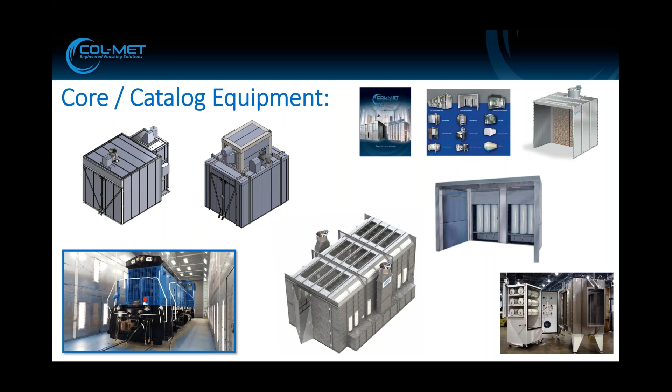When we talk about these projects, it's great how they all sort of come together, but it really takes a team - like a chemical team, an install team - to really make these things work. We'll get into some of that later today.

Lastly, I made the comment that our RP filtration products tie it all together. In 2017, we had the acquisition where we brought the research products filtration line in-house, integrated it into our facility down there in Rockwall. Last year and this year, we've been adding more resources such as filter specialists, new products and programs. One of those programs has really led to us being able to provide a 5-year warranty on our equipment by using this. We have a lot of application-driven solutions for filtration and the sheet metal. For us, it really just gives us more of a well-rounded offering to our distribution group and also end users.

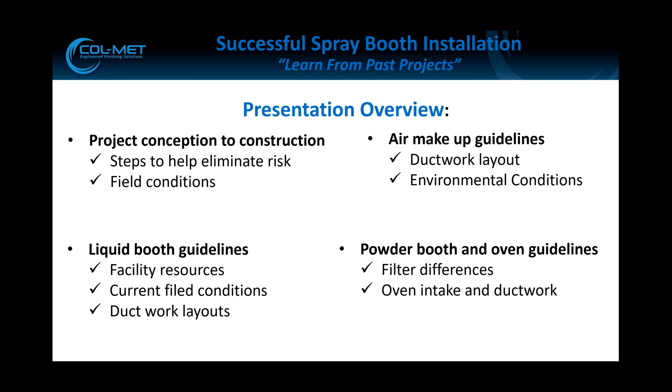These are a good focus whether it's catalog equipment or an engineering project. It really all typically starts with the same step. That first step is you get a new lead, you get an opportunity.

So it really comes down to determining the size, the needs, where it's going to go. And once you get an idea about what you're looking for, it goes to the request for quote.

Col-Met's put a lot of time and energy into developing what we call our Formstack. It's an online portal you can click on, with drop-down boxes for size, voltage, phase, offsets. It's great to get that information because it helps us design that piece of equipment and solution for those needs. It also gives you an idea of what questions to ask, and prevents headaches from happening down the road.

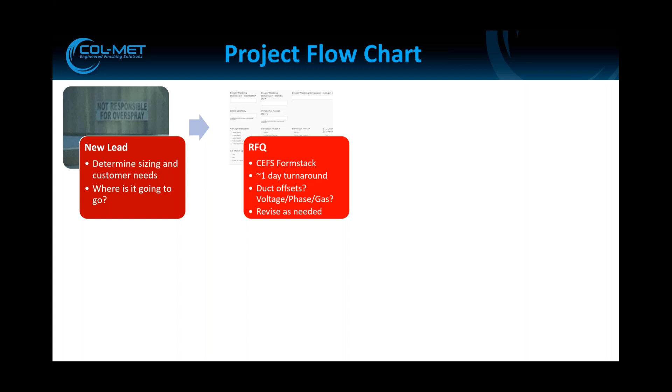Typically, once you give us all that information, you'll get your quote back in about a day.

With that, we have another system of checks and balances that makes you confirm the voltage, the phase, the fuel. What we do with that is we start engineering and designing what the needs are, whether it's core catalog equipment or an engineered project.

We take that, we can add the ductwork, we can implement the offsets. We've got a group of engineers that also work directly with end users and distributors to interact and make sure communication is flowing freely. People are explaining, 'this is what I meant by an offset,' or 'here's what that was intended to be.' So we can try to get those drawings as accurate as possible.

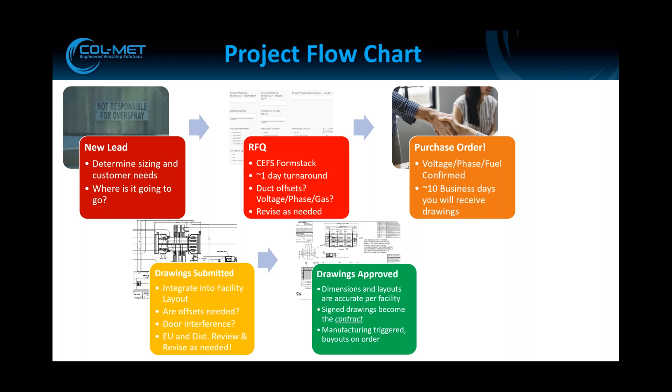And then from there, our manufacturing is triggered, buyouts are ordered, steel is being cut, the process is happening. Once that happens, that's the fun part. We get to make it, we load it up on the truck, and now it's time to go to work.

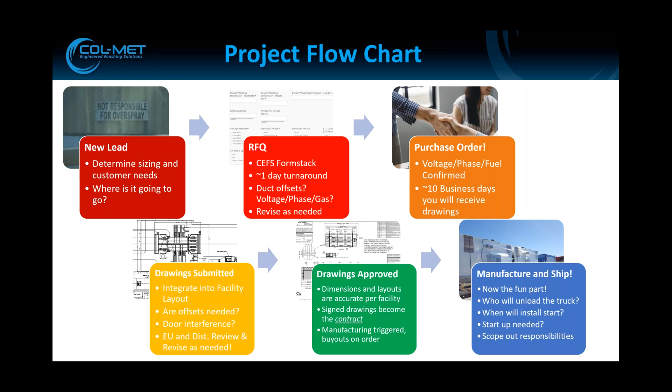So who's going to unload the truck? When will install start? Is startup needed? Ideally, all these questions would have been scoped out prior, between the distributor and the end user, so everybody's on the same page. Maybe a Gantt chart is created - there's just a lot of things we can do to try to minimize any type of surprises.

So I'm a big fan of quotes and learning from experiences. And unfortunately, this is an accurate quote, but it also is a blanket quote that a lot of distributors call me with almost on a weekly basis.

So the booth delivered today, and yesterday my customer installed an overhead crane. And if you're familiar with booths, you know that an overhead crane is really the nemesis of the booth due to ductwork and offsets. So that goes to my other favorite quote from Mike Tyson.

Everybody's got a plan until they get punched in the face. And again, what I'm hoping to give you guys today is sort of a list of questions and a little bit of experience wrapped up in a few minute presentation, so everybody can become nimble and sort of bob and weave through these surprises and these headaches to prevent any of them from happening to you.

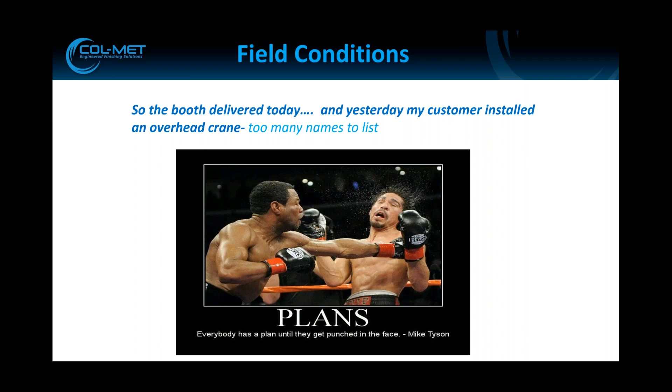So taking a look at the actual installation guidelines for just a liquid spray booth, what are some of the issues that could have happened to make it an unsuccessful install?

The drawings were approved, and then maybe the site wasn't correct. Maybe something changed. They decided that they were going to put an additional welding table in, so then the location of the booth changed. That means you might have a different obstruction and a different set of overheads.

Maybe the measurements were just wrong to begin with. Maybe it was a new build, and somebody gave you the bottom of the trusses and not the overall top of the deck of the roof. So then offsets may need to be added, and that can impact your performance. I could really talk about that all day, or just do an entire presentation on that, but we'll hold off on that.

As far as voltage and phase, you guys are probably going to hear me say this about a dozen times, but a lot of times we get the same issue where, hey, we quoted it as a 230 3-phase, but it turned out it was a single phase, or it was 480. There's always ways to overcome that, but it always comes at an expense.

And a lot of times, a lot of people don't have that built-in expense for those surprises. Does the piece of equipment that is being installed meet those electrical codes?

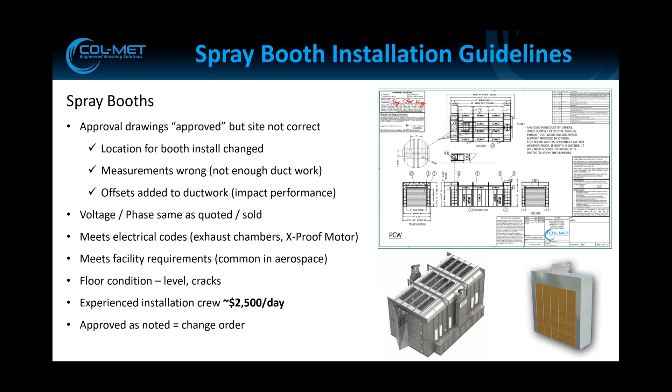Some of the very basic things to look for: verify electrical voltage and supply with the phase and ground. Just a common voltmeter will take you pretty far.

Verify the fan rotation. This is a big one. You've got a 50-50 shot. These fans, oddly enough, still move air if they're spinning in the wrong direction, and sometimes it's hard to tell if they're going in the correct rotation. There's stickers on there to verify that, but it's one of those things you just got to take a look for before you spend a day or drive another 300 miles to find out somebody actually wired up a fan backwards. Same thing with fuel type, natural gas or propane.

Pressure and volume—we've got some safety interlocks built into our equipment and controls. I'll show you a little bit later to help verify these things.

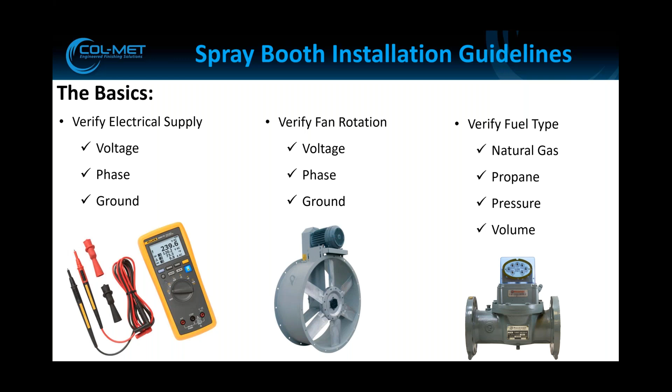With a level floor, okay, so my concrete's a little banged up, it's got some issues, but I'm just painting on top of it. Maybe my paint will smooth it out over time. I've seen people actually take that approach. The problem is when you actually go to install this equipment, we pre-punch our panels for easy nut and bolt assembly, and if that floor isn't level, you're going to have a hard time filling all those bolt holes. Not to mention your doors might not truly be square. So then everybody gets upset about, hey, it's not working, or it doesn't seal correctly, dust is getting in.

Well, it's because it's sort of built on a miniature golf putt-putt course with peaks and valleys, highs and lows. Now, to remedy that, it would be great if they could re-pour concrete and smooth that out, or they could just shim that up or create a curb for that equipment to sit on. That's a great quick field solution to keep that going.

Now, the other thing to note is if you're looking at that facility floor, maybe the concrete looks good, but maybe it's not plumb and level. If it's not plumb and you have a large truck booth going in there, you now have a heavy set of doors that want to swing open on one end and swing closed on the other. So it looks like a ghost is in there painting, and nobody wants that, especially with the safety concerns and issues.

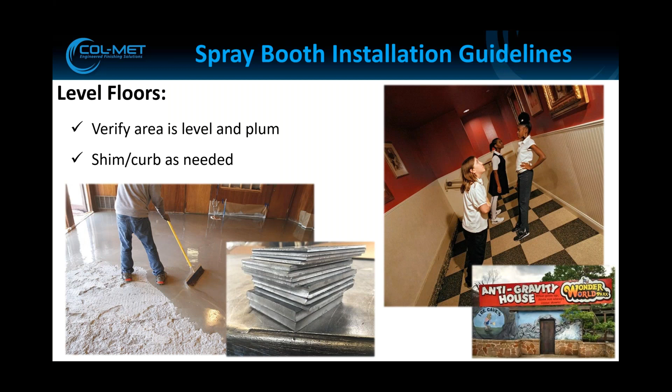Ductwork fails. This is a whole compilation of something we could talk about all day, but this is one of our favorites. We sold a pretty straightforward booth, and the big concern was it just wasn't moving air. The fans, correct rotation, voltage, phase, all that's good. Just what's going on? By the time we actually put the vehicle in park, we could see what the issue was in that facility.

Offsets, elbows, transitions—all that creates static pressure. Not knowing that during the quoting phase will lead to poor performance of the equipment, non-compliance. But again, if we knew that during that quoting phase, we could come up with a solution. Even if this was the only opportunity to run ductwork, and that's what they had to do, we could have potentially gone to a vane axial fan versus a standard tube axial. The kicker is that vane axial fan is substantially more in cost. And again, that's just a surprise nobody wants after the fact or after the sale.

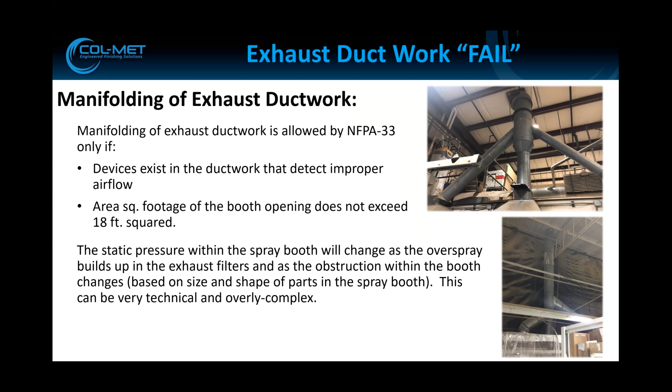Manifold of exhaust ductwork—you guys will have a handout of this, and this is sort of a clipping from NFPA 33. Everybody wants to do it because they want to minimize penetrations in the roof and offsets. There is a way to do it, for an extremely small opening booth or a small piece of equipment. But ultimately, it just doesn't work.

And going to this slide, these are some good pictures of what does work. Now, our simple rule is no manifolding of exhaust ductwork. Keep it simple. There's a lot of issues when you start designing how that's all going to flow together, how that's going to tie in.

Again, looking at some of these pictures, these are great examples of ductwork done well. The problem is, during that install phase or initial design phase, if there's an incorrect reading on that roof height, you now have one mistake that's going to be made 14 times on a large spray room, or 6 to 8 times on a side downdraft.

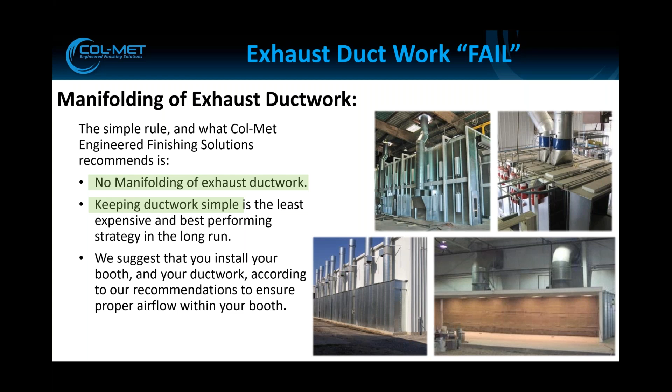Air makeup units. Air makeup units seem very complex, but really, it's just going to take fresh air from outside, heat it, and dump it into the building or the booth. Simple enough. The problem is that clearance and placement—people run short on shop space, so they really try to pack stuff together. And whether it's propane or natural gas, that'll determine the orifice size of that burner.

One of my counterparts here, unfortunately, went out and had to go help somebody try to change that, and I believe he actually hand drilled each of those. Nobody wants to do that. It wasn't recommended, but everybody agreed they were going to accept this as the solution. It's just really not a great way to do it. And I know my counterpart would have much rather spent his weekend doing something else.

Looking at air makeup units, you've got to also understand that when these things use gas, do they have enough pressure? Do they have enough volume? Is there an oven downstream or upstream in that gas line? Can these things operate at the same time, or is it going to drain all of those facility resources?

Looking at the picture in the right-hand corner, our air makeup units are very advanced in terms of controls. Each one is typically a custom design, and with that, we have an opportunity to put ductwork exiting in different locations.

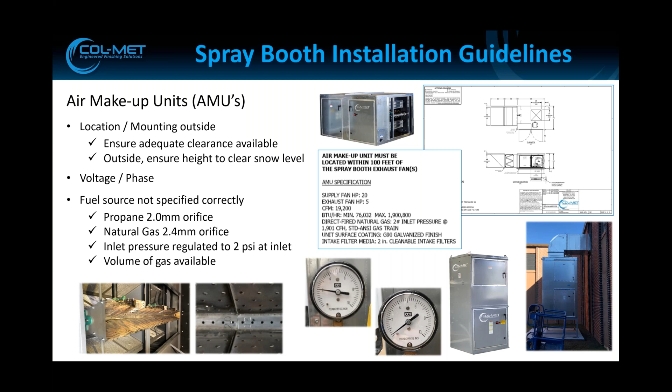This is another fun one from travels. You can see here an air solenoid valve actually put into a 2-inch gas line. One of the tells that this shouldn't have happened is that you have a half-inch solenoid valve that bottlenecks a 2-inch line. Really, the best practice is never reduce pipe size or duct size. We can't harp on that enough.

We do have a tech department standing by to help answer questions if somebody isn't sure about where something goes or what to do. Another safety check.

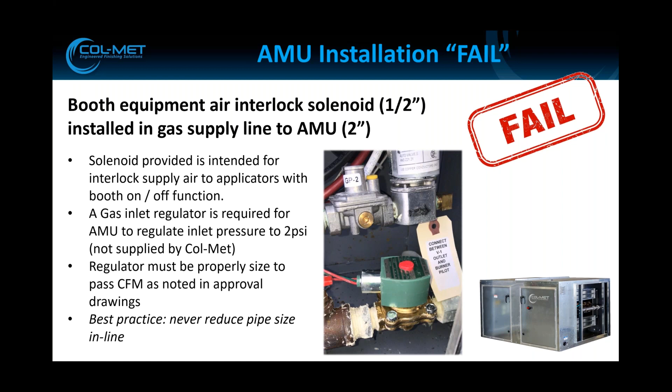It's a check sheet. We do have these check sheets for AMU startups during the install phase, just to make sure everything is happening in the order it should. If everything is checked off, install is really a breeze and it makes the equipment happier. It doesn't allow for any future faults, meaning it minimizes faults from happening because the burner is set, the pressure is set correctly, and diaphragms and valves aren't being destroyed.

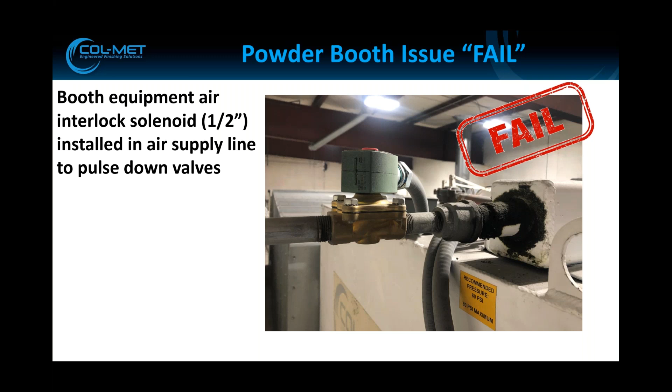Another good solenoid valve fail is going into the powder equipment. This is just another fun one to show that even in our powder booths, even though our collectors are pre-wired, programmed, with VFDs mounted, people still sometimes have an issue understanding what it takes to get those things up and running.

Looking at our cartridge collectors, the most common issue people have is usually months after install—they go to replace their cartridges and say, hey, these things are blinding out, they're not working very well, and I'm buying final filters every couple of weeks now. What gives?

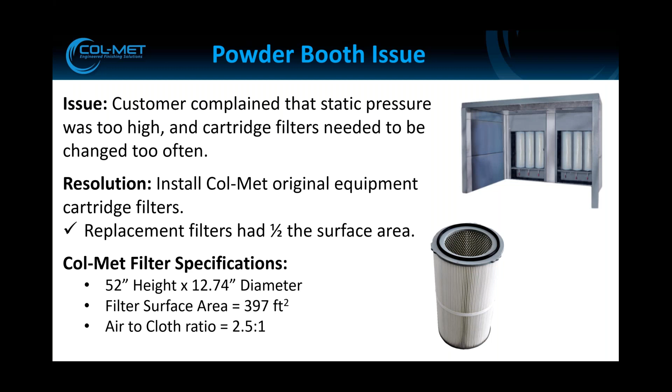Well, if you look at what we're providing initially, our 52-inch cartridge collectors have a filter surface area of just under 400 feet if you were to pull that media apart. A lot of others will be cheaper and less costly because they have a third to even a half of that surface area, and that just creates blinding out and a higher consumable cost.

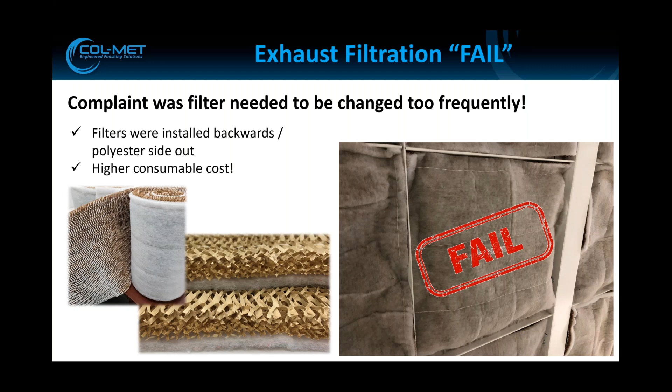Our ovens are extremely industrial rugged, and with that they've got a burner with a forced air fan attached for combustion. If your shop is dirty, if you have a ton of powder migrating around, you'll essentially be pushing that powder through those burners. So cleanliness is a big thing, potentially pre-filtering the air going into those burners. All these things can offset that, but you, as the distributor or end user, can hopefully see these things before it goes in, and make recommendations so nobody's disappointed with performance down the road.

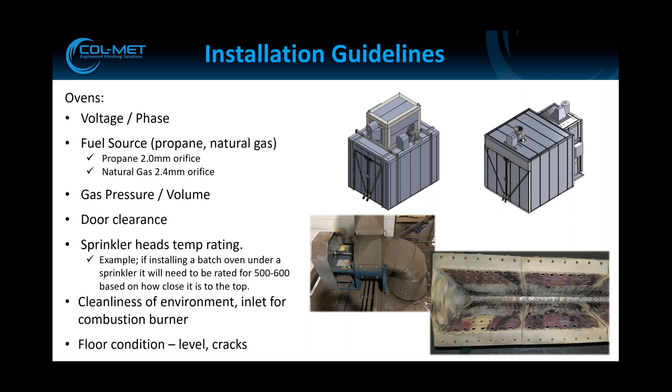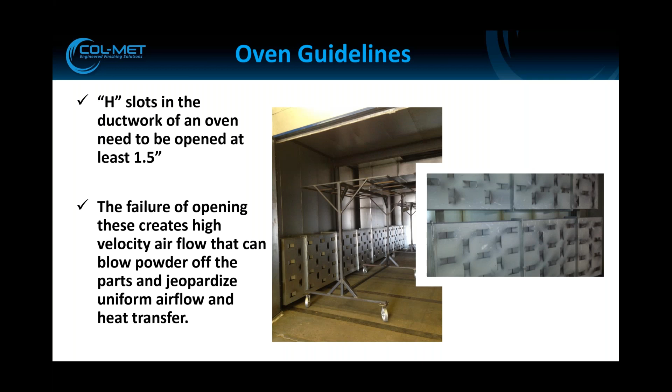We also have another good webinar that talks about heating and curing products. And with that, we actually do have an app for that.

With that, you can use our SmartConnect and connect to a mobile device, and actually monitor what's happening and see what's going on. And if you're completely lost, you can hook it up to your local area network, and our technicians at our facility can monitor what's happening and walk you through to get you up and running.

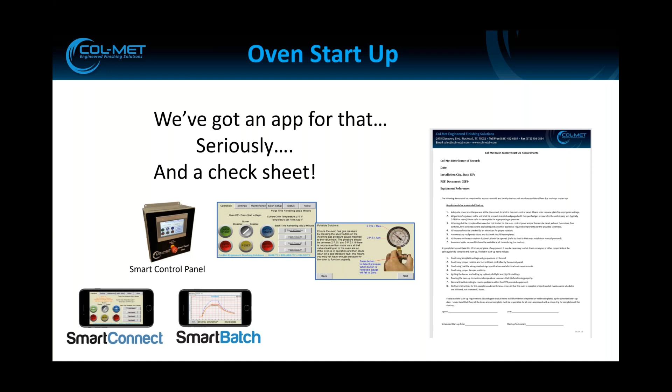Oven fails are always unique. It's really hard to fail whenever you're making a pizza, but I will say the secret sauce is usually not welding slag and grinding material. So while we do make ovens, we don't recommend them for food prep at this time. That's sort of the quick tour of things to look for during installations.

Thank you, Chris. Excuse me.

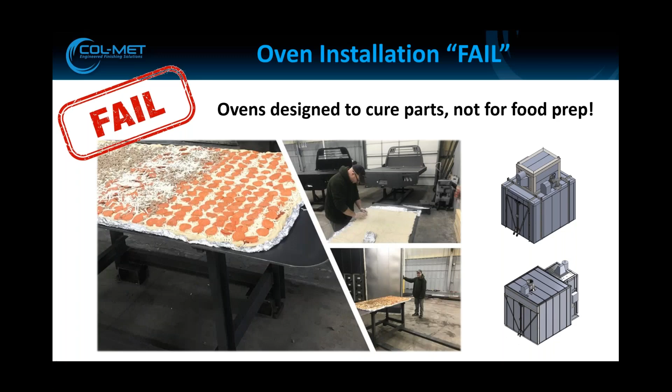Can you go back to the first page, Chris? I guess the question is, can you go back to the first page of the presentation? Not sure. I'm just going to do it old school here, so apologize if I make people car sick. I'm not sure what it is. Let me just see if I can find out what he was asking. I'm trying to see what it is he might be looking for, because is it the Col-Met building or what he might need here?